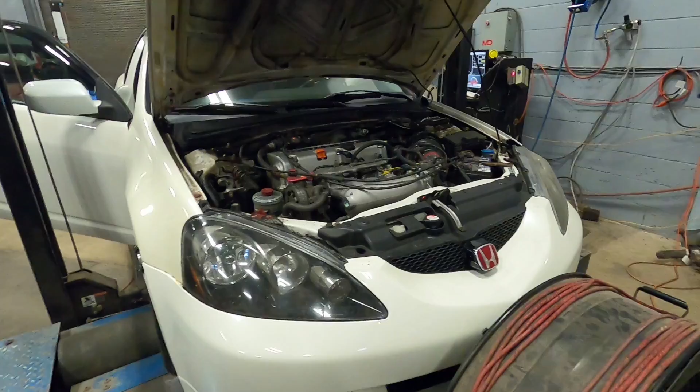Hey everyone, welcome to my advanced how to crackle tune your Kpro on my RSX Type S. This is my 2006 RSX Type S with the 2006 K24 TSX engine.

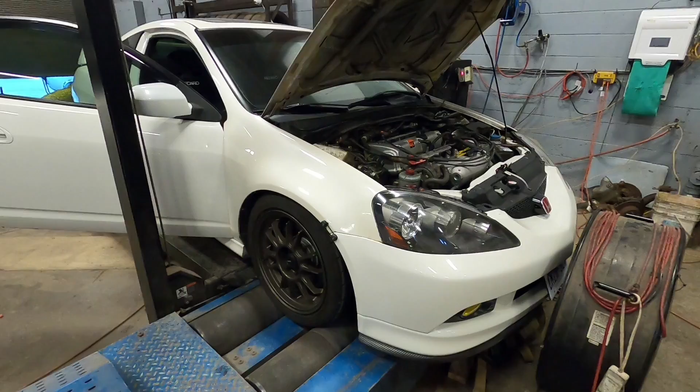This video is going to be the advanced version of how to crackle tune, where you can use a switch to turn off this function and feature. If you haven't seen the first video, I'd suggest watching that first, because that covers how to set this up initially. Once you've watched that, come back and watch this video, because it will give you the next step on how to do things with a switch.

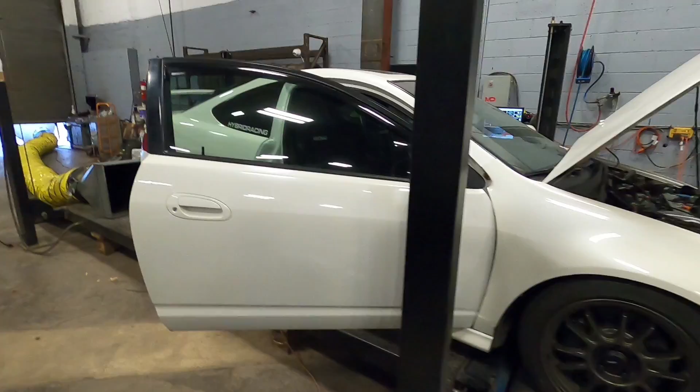What I'm going to show you is how to use output functions, called the nitrous features of the Kpro, which basically allow you to arm and disarm and then add the timing to do the crackle tuning. Basically, what we have to do is tap into a trigger wire in the harness.

What I'm going to use is the VTEC pressure switch. We don't really need that wire, so it's a great use of a trigger to arm this system, and that's what we're going to use to activate it, to turn it on and off. The way this works is we're going to cut that wire, hook it up to a switch, and that switch will provide a ground to the ECU. When the ECU sees this ground, it knows you want to turn it on, and when it doesn't see the ground, that's when it knows to turn it off.

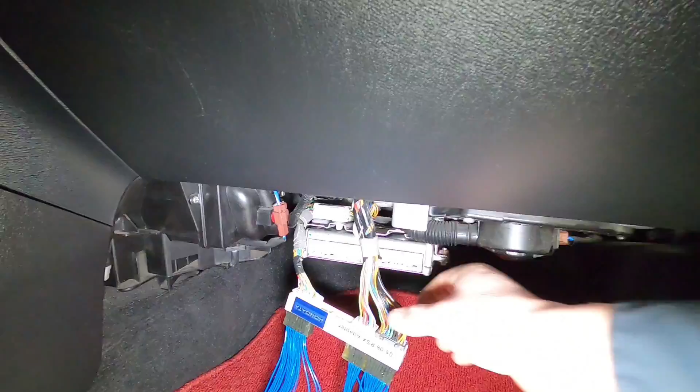So what I'm going to do is cut wire B11, which is the VTEC pressure switch, on my car, and it's the blue with black stripe wire. I'm going to cut that and hook it up to a ground, and that's how we're going to activate this system. Let me take care of that, and I'll show you how to set everything else up.

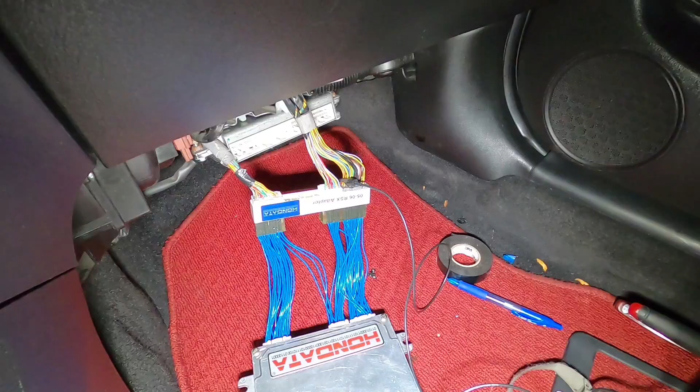Okay, so I've got the car up and running, and as you'll see, I've cut the VTEC pressure switch. In this car, because it's 05-06, it's B11. In the 02-04 cars, which is what most of you will have, it is B9. So you cut B9 or B11 on the ECU side and attach a wire to it.

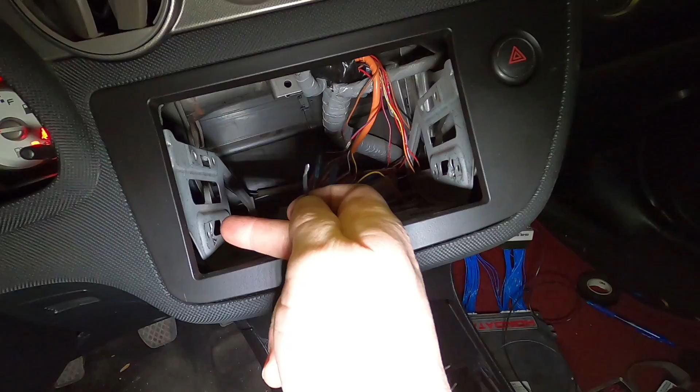Basically what we do is the other end of the wire has to provide a ground. For the sake of this, I'm going to just show you - I have metal here which will act as a ground, and you touch it and that will activate the system.

So the way this gets all set up is exactly the same. We basically need to retard ignition timing on decel, but what we're going to do is utilize the nitrous controls to set up triggers and specific conditions so that it only happens when we want it to happen, and if we've flicked the switch.

So what we're going to do is, with your normal map loaded up, save a normal copy of your map and put it somewhere safe, then load up another one and call it Crackle Tune Advanced. The first thing we need to do once we get over to the nitrous control is actually turn it on.

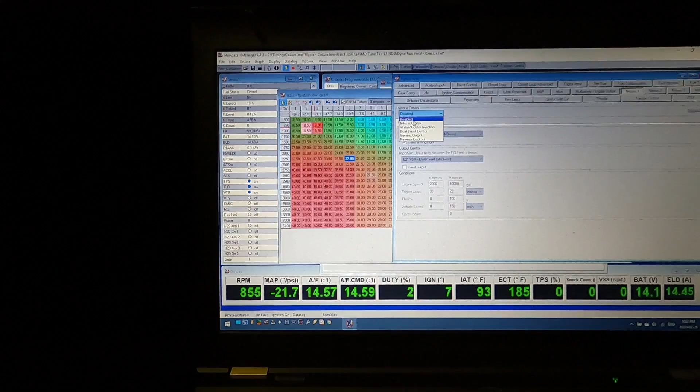So under nitrous control, there's this tab. It should be disabled normally. What we're going to do is call it generic output, and first set it up.

We're going to set up the arming, which is your switch first. We're going to specify that that is B9, the VTEC pressure switch. This technically doesn't matter because we're not actually programming any output, so you can just leave it as is. And we're going to have to specify that we want to check on invert arming input.

The next step is we're going to have to specify the ranges that we want this to happen in. In this case, we don't want it to happen below 2000 RPM, and we want it to happen up to a maximum of 10, which just makes sure it happens up to at the bare minimum redline.

The next parameter we have to make sure it's going to work is engine load, and this is the critical part, because what we want to do is make sure that it only happens under decel, not when we're accelerating, not when we're cruising. So what I would do is switch the unit value to inches, then specify 30 for the minimum and 22 for the maximum. So if it's above 22, it won't happen.

The next step is throttle. Make sure it's at 0, and what I would do is also, to make sure it doesn't happen too high, set it to 20, because we don't need it any higher than that. Any higher than 20, it's not going to matter.

Vehicle speed, make sure you can actually specify that it happens at certain vehicle speeds, but 0 to 158 is fine, and then leave the knock at 0.

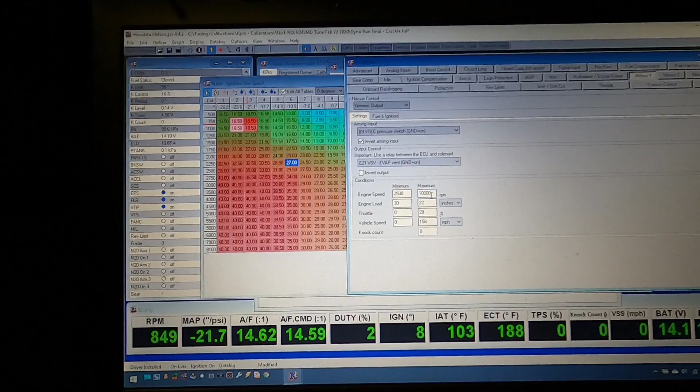If we go back to our settings, everything should be good. If you don't want it to happen right at 2,000, you can specify 2,500, for example, and it will only stop doing it once it gets to that RPM. Even if you have the value of -40 at 2,000, these settings will override that. So let's set it at 2,500, and you'll see how it works.

I'm going to show you how the ECU knows what's happening. If you watch N20 arm 1, right now it's off, but if I go and touch the ground, it turns itself on. That's the way you know it's working. You can test this.

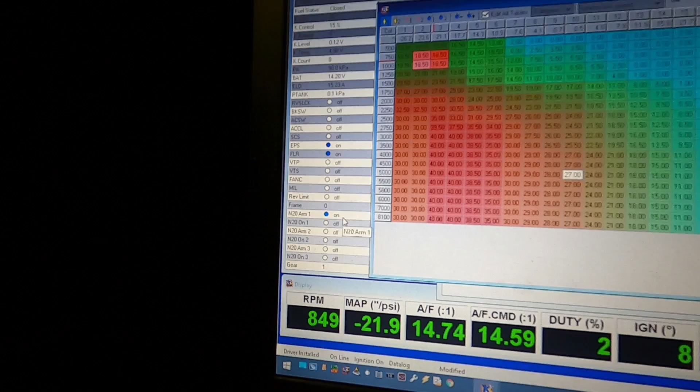On to the last step, which is the ignition tables. Just like in the non-advanced Crackle tune how-to video, we have to adjust these. The issue here is simple math. If we already have a value in these sections, where we're going to be decelling and where it turns itself on, if it's already 40 degrees and we're going to take away 40 degrees, we're only going to be left with 0. So the maximum we're going to see is 0, and we need more negatives than that.

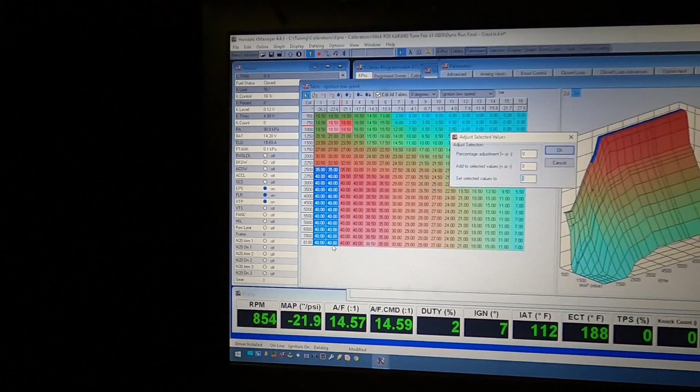What I would recommend is, in the range that you want, for example if you want it to hit -20, I would specify that we make this value 20. That way, when we add -40 to this, we'll be at -20.

Likewise, if you only want to run -10 and you keep -40 in our ignition settings, then you could just switch this value out to Control J, tab 30. So again, 30 degrees base minus 40 degrees adjustment would give you -10. I hope that makes sense.

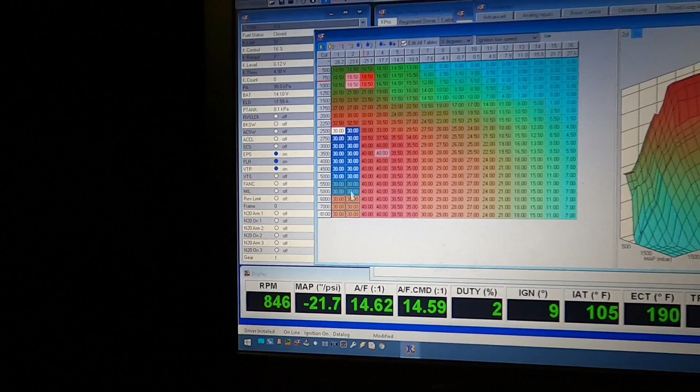Now I'm going to show you what it's like. I'm going to shoot for -10. I think -10 is a good all-around number. It doesn't take too much off here, so it won't create issues or cause popping while you're normally driving. When you go and activate the Crackle, -10 will still give you some pops.

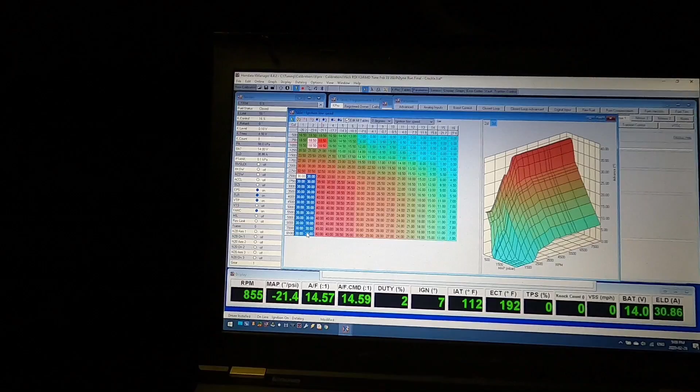In regards to the fuel setup, there's no real way to turn on and off the overrun condition, so you will always have to activate it with TPS, basically riding the throttle on decel to make this happen. Like I said, it's not perfect, but it kind of gives you the best of both worlds.

So I'm going to make sure all of my settings are uploaded. Upload. And you'll see no popping, whatnot.

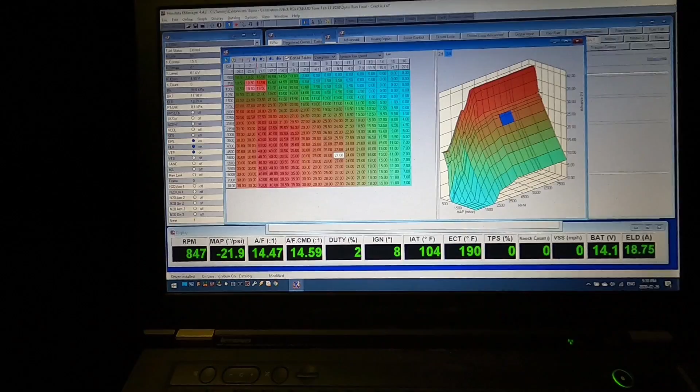It acts normal. I'm going to start driving, show you how it's still acting normal, and then I will trigger the system with the ground and show you how it turns itself on. Now I'll start driving, get up to speed, get into 4th gear, and show you how it works.

So in 4th gear, I let off, no popping. Even if I ride the throttle down like I normally would, there's no popping. So you can drive around normally and not attract any attention.

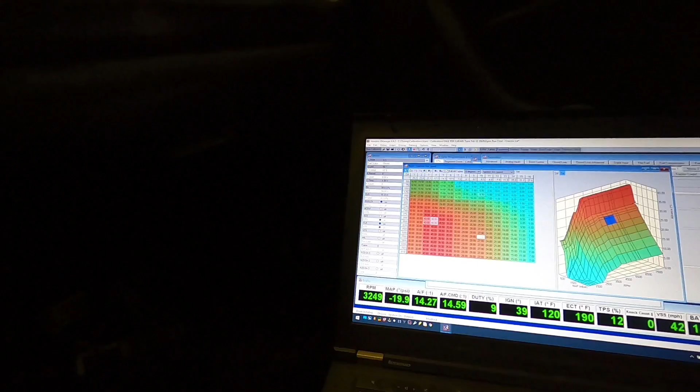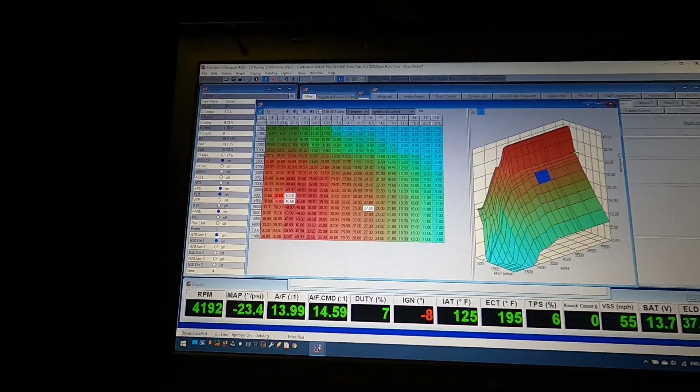But if I go and arm it, so now it's armed, trigger, it goes back to normal.

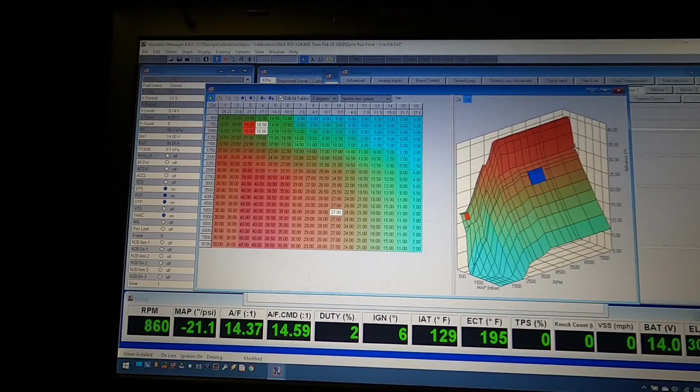Hopefully that makes sense. Hopefully that shows you guys how you can technically get the best of both worlds with this setup. You can make these adjustments, keep them in the system, and have it all activated with a switch utilizing the nitrous functions. I hope you guys found this video useful. It's an interesting way of utilizing some of the features that Kpro has to offer, and I do have some other videos planned that will use more of these features, so please stay tuned.